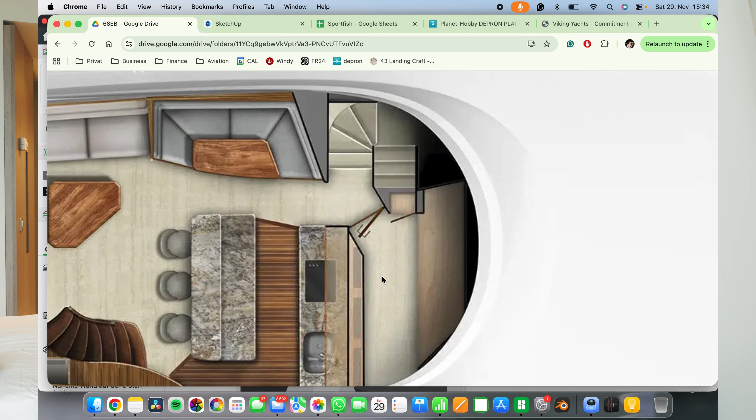And down below, you could think you have another bridge, but actually it's not a bridge - it's much more a storage area, and you can see that in the picture here. Maybe some stairs towards the lower deck, or even a head - sometimes a day head, or maybe even a cabin. And the boats are called convertible for a reason.

The boat I'm building at the moment is going to be a 50C, and we're going to talk about all the components and all the functions that this boat's going to have in a minute here. But for now, this is the Viking layout.

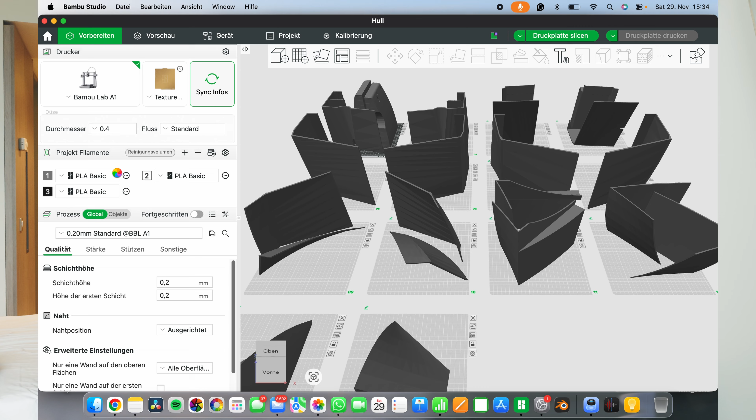It's a beautiful boat, I really mean it. This looks a bit comical though - the height of it, and also the two bridges laid on top of each other look exactly the same. It's kind of comical, but I don't care. I'm not going to build this one.

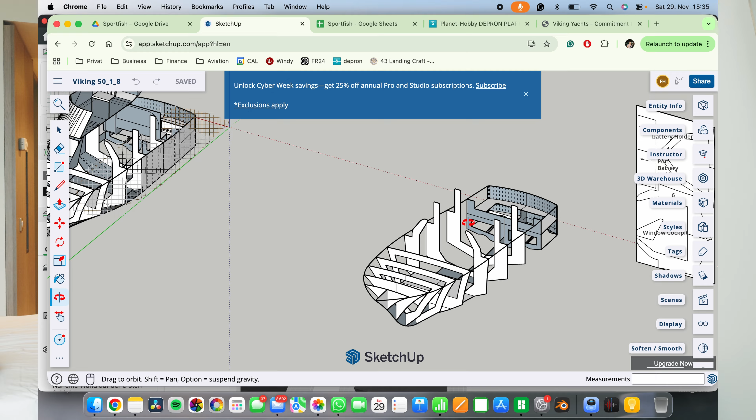The reason why I'm not going to build this one - I'm so happy with the way the plans of the 50C turned out. So this is going to be the 50C, again a beautiful boat. And this is the way it looks, all the ribs on top of each other - this is actually what I'm going to be sawing out here.

The box plate, the cockpit decks, all the ribs here, and they already have those encavements for when they go on top of the keel, all numbered and labeled. This is going to be a traditional way of building, with one keel after another, and the ribs in between.

Let's talk about all the functions that this boat's going to have. I'm going to have 2 engines on it. It's going to be a 2-screw boat that are separately, individually controlled by one another. Pretty cool stuff, Engine 1 and 2.

This is what I'm going to be using, and I already have ordered the engine for the boat, and also the electric engine controller. This is going to be the engine, 60 quid times 2, 120 quid for the engine. Pretty cheap option, but I'd rather invest in a good engine controller than a good engine. This is for a 1000mm boat.

I'm not planning to go on really fast speed. I want to have my boat plan without any problems, comfortably with cruising power on those 2 engines, but I'm not gonna be going 50 kilometers an hour or 30 knots or something. It's gonna be more like 20 kilometers an hour comfortable planning speed, or about 13 knots.

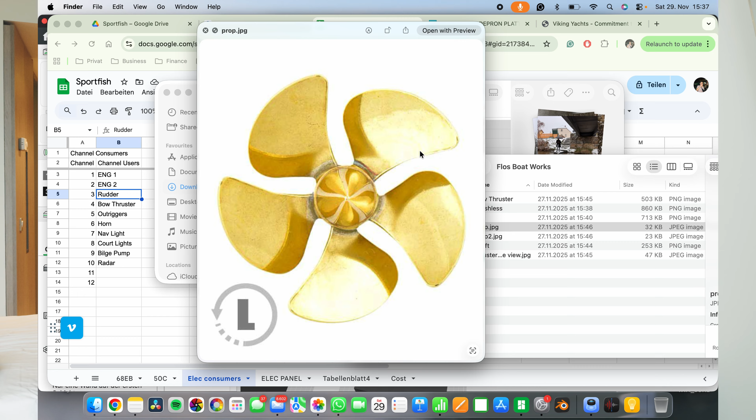This is the prop I'm going to be using. This is a beautiful brass prop, made of some kind of iron. I looked at all the hull photos of the Vikings, and this was the closest one I could get to. You might notice that this is a left turning prop.

The reason for that is that with the forward motion of the boat, the propeller is going to be self-tightening, and being this is going to set me back 60 quid for the one prop alone, I don't want to lose it. This is why I'm using a left turning prop, not counter-rotating. This would be good for countering out that effect the props have when they're walking the boat along, because if you have a right turning prop, whether you go forward or back, the boat will be pushed either way.

So this prop is going to be handling the boat differently depending on the rotation. If you have 2 props, you could theoretically cancel that out, which modern Vikings do have, but it requires a different gearbox or different set of engines to do that. With electric motors it wouldn't require anything, but I didn't see much benefit in canceling out that motion, since I have 2 separate engine controllers with individual control anyway.

So I went with the option to have that tightening onto the actual stern tube shaft that is here, so as not to lose them at any time.

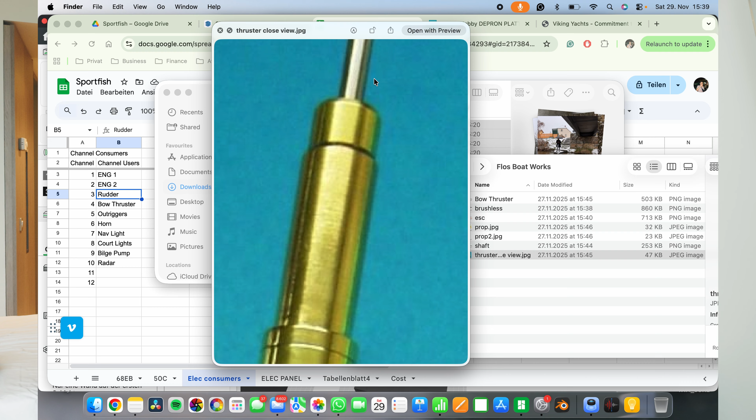Bow thruster is something I will have as well. I'll have that connected to a 12-volt brushless motor, 3S, connected with 1 battery. Pretty good, powerful bow thruster, looking forward to that, also beautifully made. It's 140 or something as well, so it's pretty expensive stuff. The part list is going to be down in the description.

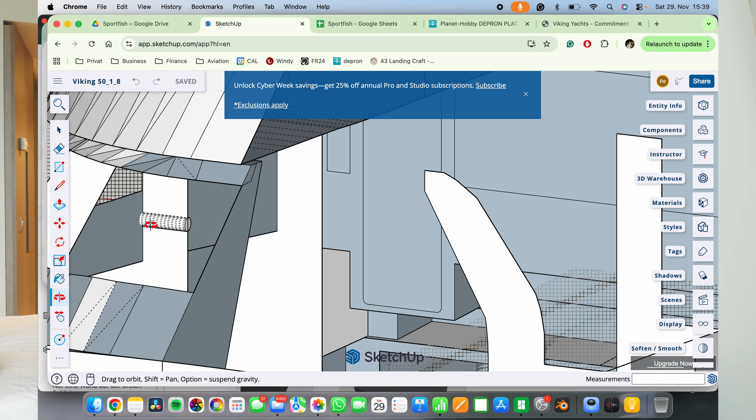I will have outriggers as well. These are going to be connected to this sturdy rib here, and also this whole lower cabin area is going to be completely watertight and shut to the hull, so not removable. What is removable is this upper bridge deck, which will be removable with the whole tower and stuff. And while the outriggers, I want them to be stayed onto the hull of the boat to give them stability, and this is going to be removable.

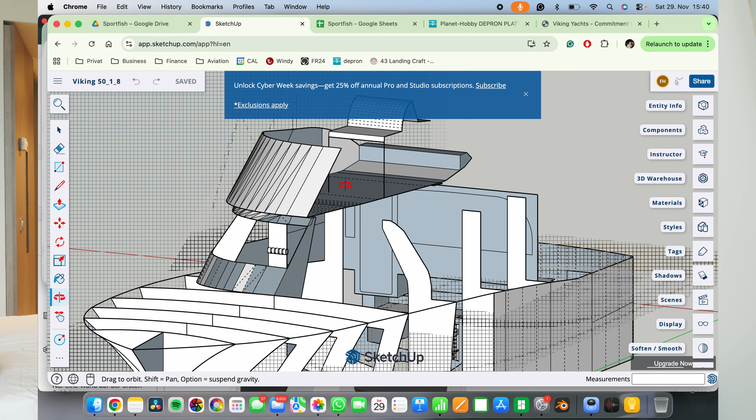Also I'm going to make cable connectors again, with all the lights going with a cable down towards the electrical center box. I'm going to have a horn as well, nav lights, courtesy lights, and a bilge pump that is not automatically controlled because I don't have too much of a good experience with that, but controlled by a relay with the receiver.

And I have a radar that is going to be turning on top of the roof here of my helm. So yeah, that's going to be it.

I also have a fan, probably wired to the master, that is just continuously pumping fresh air into the internals of the boat. Also have a cool pump that will be turned on at 32 degrees, turned off at 30 degrees, and that is connected to the engine controller, as there's a more vital part that may be overheating. This is fully automatic. All the parts again down in the description.

I'm going to have interior lights to make it easier to work on the boat, working with only one battery, and push buttons I will have as well. So the whole electronics part, I'm still figuring out how to do, but essentially it's going to be one main plate. Let's just look at the drawing here real quick.

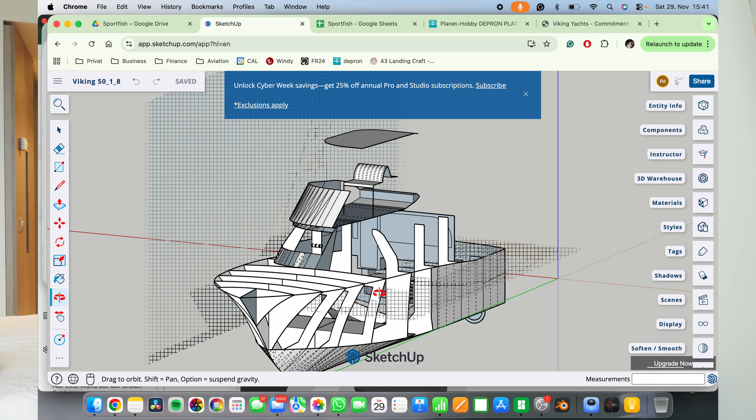It's going to be one central electronics box right here, with an area down here that is kind of protecting the wires from hitting the bilge. The wet bilge actually only starts here.

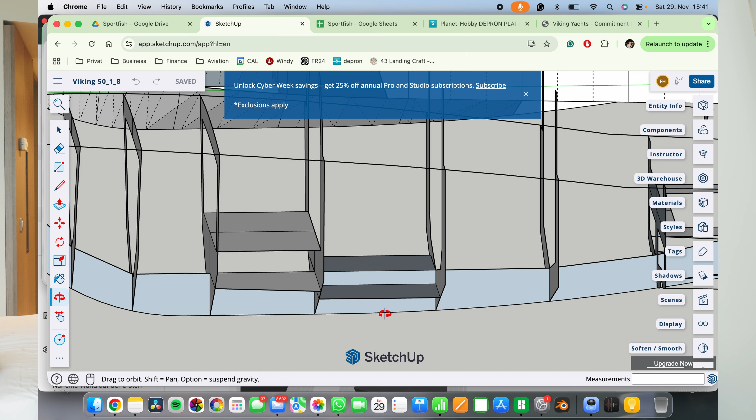All the forward is going to be completely dry. This is where the engines will be. This is going to be the wet bilge, and everything else will be completely watertight, so as not to have too much of a bilge with water dripping around. So this is all going to be the wet bilge, from this bulkhead here to the last one.

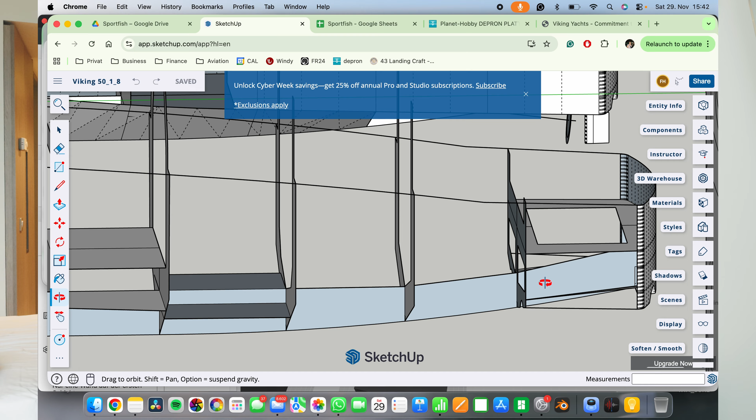Here the inspection hatch on the rudder house is going to be underwater sometimes maybe, and there will be some gutters connected to the sides, dropping excess water away from the bilge. Even if there is water coming down here, it's not going to be a big deal, as there will be a bilge pump together with all the other pumps connected here.

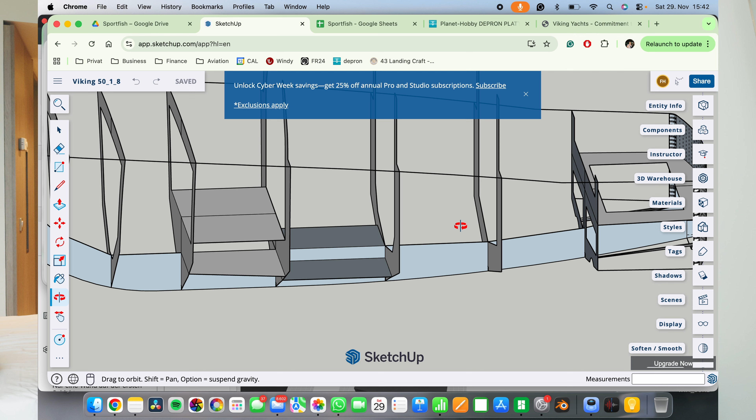The exhaust back here is going to be connected to the outlet of the cooling water, which will be looking pretty good if you're going at full throttle with the cooling water splashing out at the exhaust. Not going to do anything smoking with the exhaust, just the cooling water here.

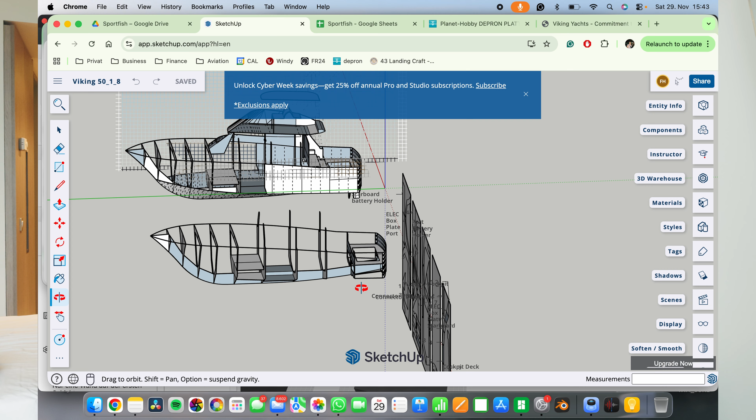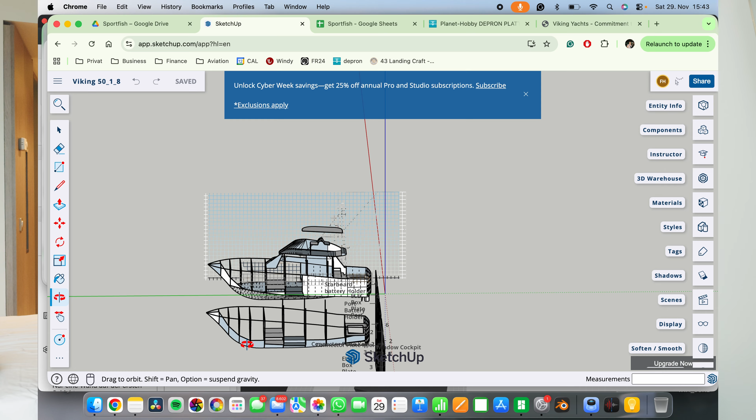Price-wise, the electronics with the tube, the shaft, the propeller and everything I just showed is going to be like 800 euros. The whole part list is down in the description below. The wood and stuff probably gonna be like 100 euros, and all the other materials I'm gonna be probably around 1.4 to 1.5k, cheaper than the other boat. I hope this will be the final price. I don't know yet, I'm not going to be selling it, so I don't care really about the price anyway.

It's my personal boat. So yeah, this is a Viking 50C. As I already said, I'm a big Viking Sportfish fan. It's a beautiful lineup they have, I like the way they look, and the reason why I did the Viking is just for simplicity, and also these are the toughest boats out there in terms of sport fishing and leisure boats. So really good sturdy boats, and I'm very happy to build that.

It's going to be like a 2-year build process, and this whole video series is going to take you all the way down to nitty-gritty stuff like building the rudder itself and all the steering and stuff. So it's going to be pretty good, a nice video series for you guys, I think.